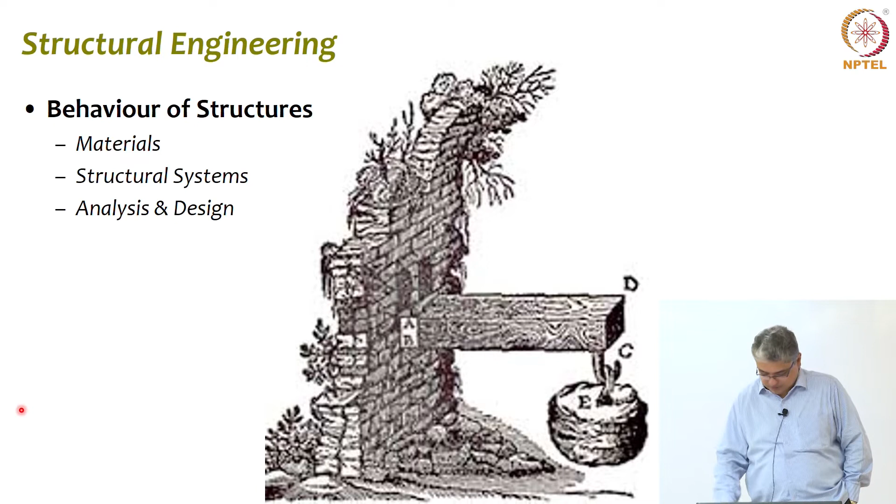So talking about materials, if you think of civil engineering as such, we use a lot of these, starting from simple thatch to earth, mud, clay, then stone, wood. Wood is a very important material that has been used very successfully in civil engineering. Then of course brick, concrete, steel, and so on.

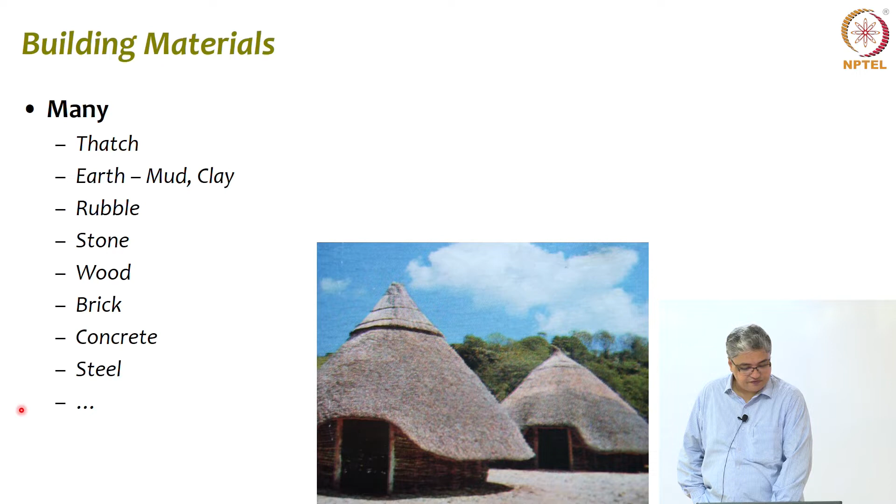So I'll not go into the details of all these, but effectively what is it that we are looking for when you talk about materials? We are looking forward to understanding some basic properties, and the two fundamental things that we are looking for are chemical and mechanical properties. So what do we mean by that? How is that manufactured? If it is not a natural material, a man-made material, what constituents are to be added to make that material is the first thing, and then what properties help us actually create structures out of those materials.

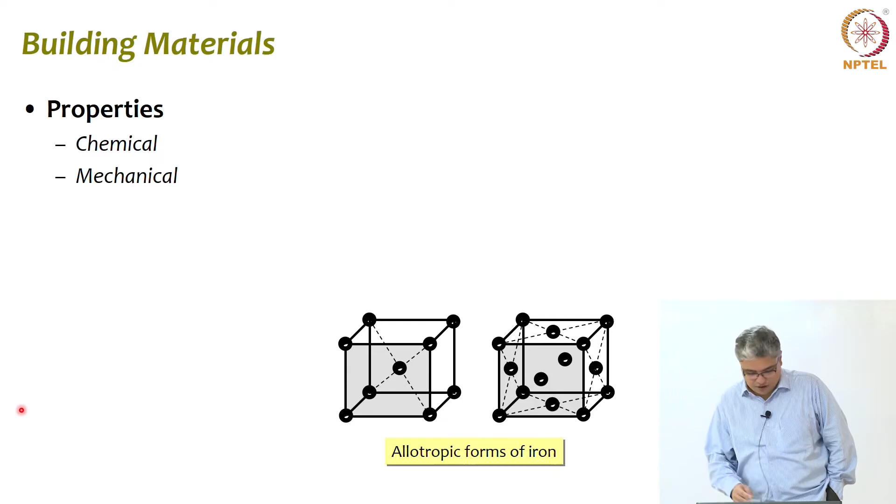So chemical properties are very important. For instance, steel is a very common material we see today, right? And that steel is made starting from iron ore, but then it has to be processed and made into a form which we can use in construction. You see two different allotropic forms of iron which give certain basic properties to the steel. I'll not go into the details of it, but chemical properties are important.

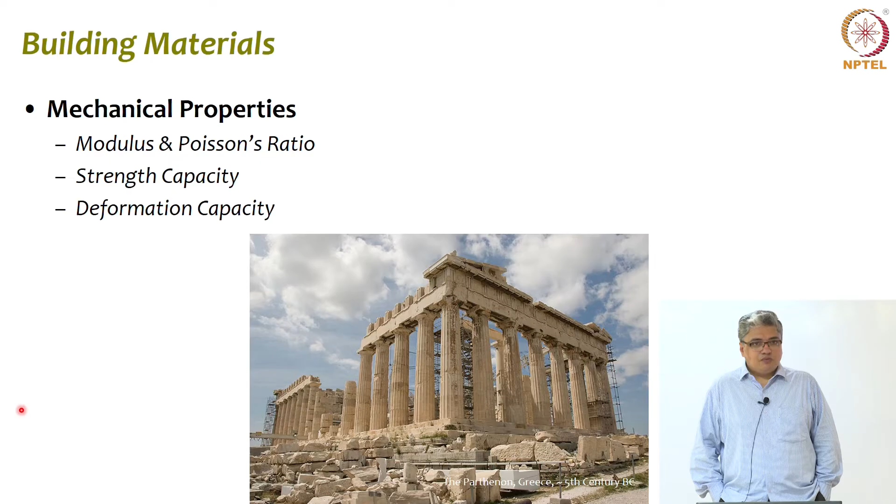Similarly, cement and other materials that you are using, what is the composition of different ingredients that gives it its characteristics. But talking about mechanical properties, again there are a whole lot of other mechanical properties which are important for different cases, but the fundamental things you must know at this stage are what is called the modulus of elasticity, Poisson's ratio, which is nothing new, all of you have learnt about it in your physics. And then we talk about strength capacity and deformation capacity. Let us see what this is.

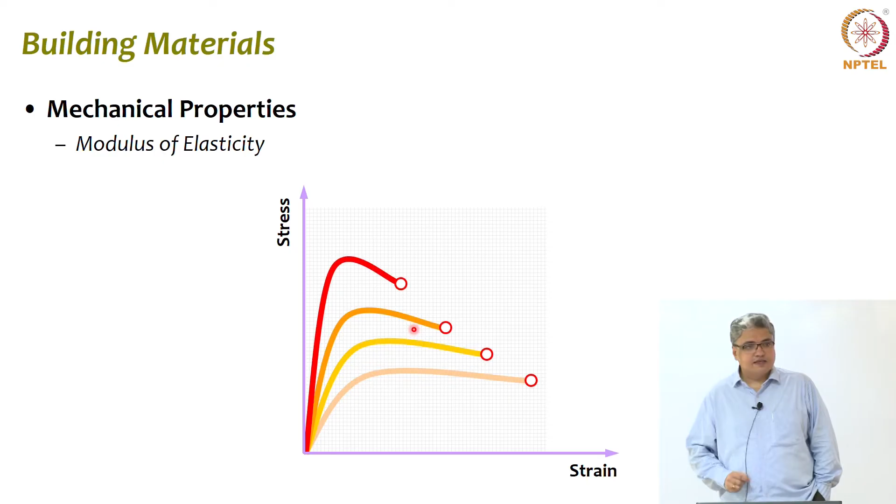So if we start with a material, the first thing we talk about is its stress strain curve, right? All of you are familiar with stress strain curve from your school days. So just to give you an idea, I'm drawing some stress strain curves. It doesn't matter what material, but just look at the nature of it. Typically what you will see is that as we start, initially there is a more or less linear elastic portion, and then it touches a maxima in terms of the stress, and then the material moves, deforms or strains by different amounts. So we can have things like this. So modulus is this initial slope, between the stress strain curve, this initial slope is what is called the modulus of elasticity.

Obviously, we are looking at different materials having different modulus of elasticity. For example, if we talk about steel, the modulus of elasticity of all steels varies more or less between 200 to 205 to 210 GPa. What is GPa? Gigapascal, Pascal, you know, Newton per meter square, right? Similarly, if you look at different materials, you will see different materials have different modulus. Similarly, different materials will have different Poisson's ratio also.

But more than that, as structural engineers, we will be looking very closely at this value, the maximum stress that a material can handle and the maximum strain that a material can handle, right? So let us look at it.

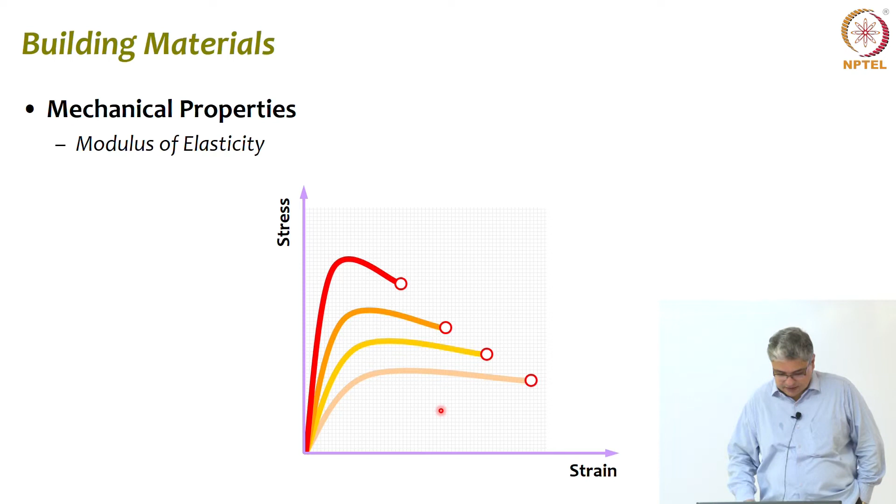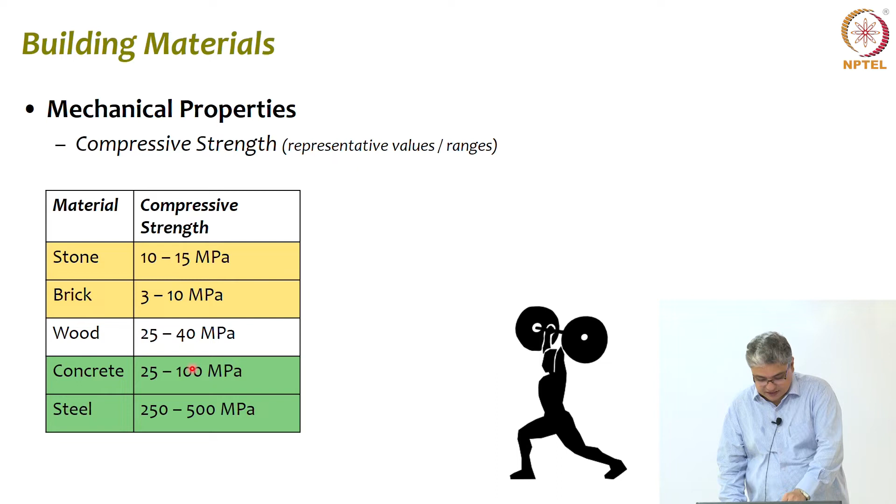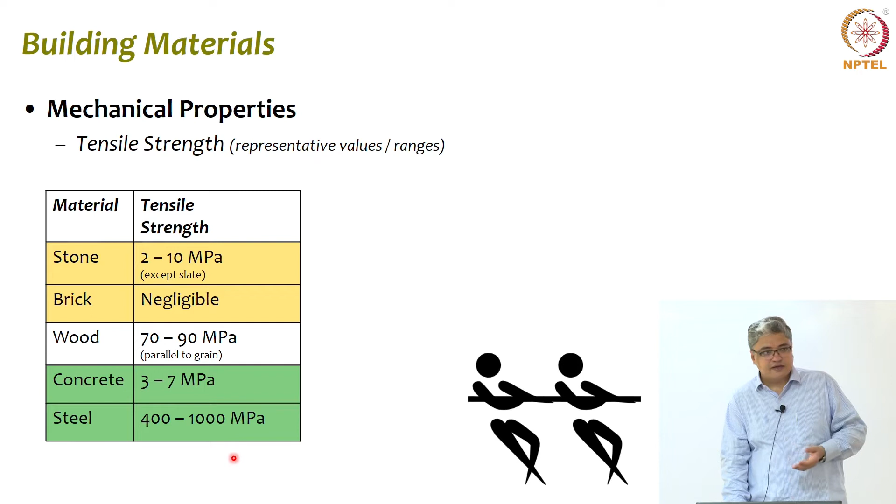So we see there is a basic difference in material properties. We keep in mind that certain materials can take compression to an extent but cannot take tension, and certain materials can take both, are good in carrying both tension and compression. If we understand this concept, we will understand why we are building certain structures today using certain materials which we were not able to do earlier.

For example, mild steel has a certain mild percentage of carbon added to it, and that's where the name comes from. You can have low carbon steel, mild carbon steel, moderate carbon steel, or high carbon steel. Typically, the stress strain curve looks something like this. Here you see the strength is about 250, and typical concrete strength we saw about 25, 30, 40. Today we are making 100, 120 MPa. So the strength is about one-third to half.

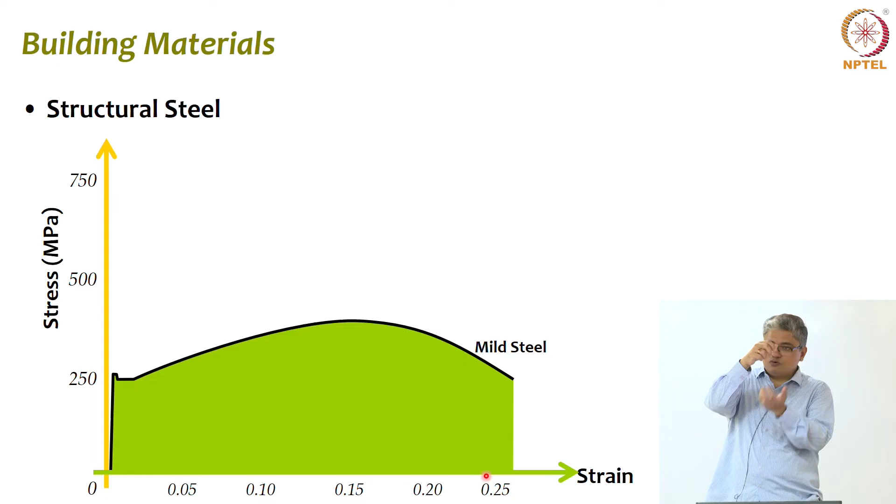And here if you see strain, I did not talk about the strain. Here it goes to about 0.25, that means 25% elongation. Concrete, the strain will be something like 0.0025, 0.0035, one-hundredth of this. So if I take steel versus concrete, load-wise concrete will take about half to one-third, and deformation-wise it can deform one-hundredth of what steel can deform. And if you talk about masonry, it cannot even deform, cannot even take what concrete takes.

So that's where we have to understand why different structures are being built with different materials. What I'll urge you to do is, on this graph, draw the stress strain curve of concrete, wood, steel, stone, and masonry. Now this behavior changes, we saw in both tension and compression, they are not symmetric. So your exercise would be to take a sheet of graph paper and draw all these to scale and see how materials are very different in terms of their behavior.

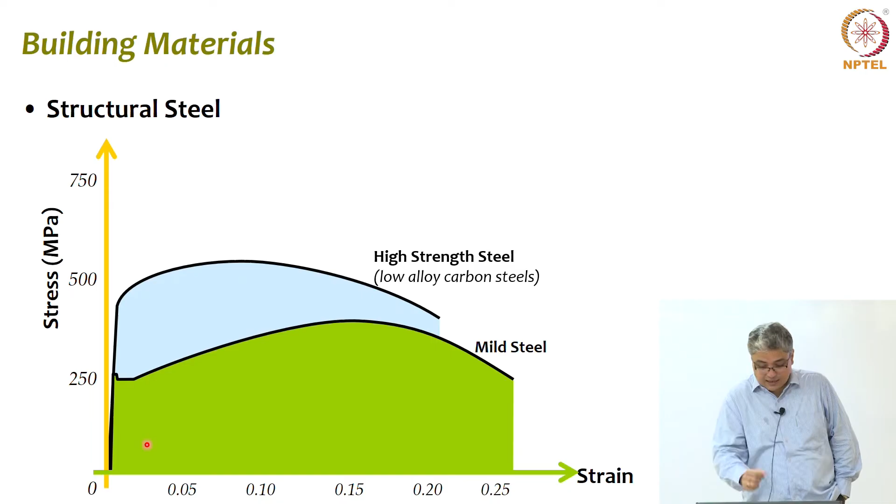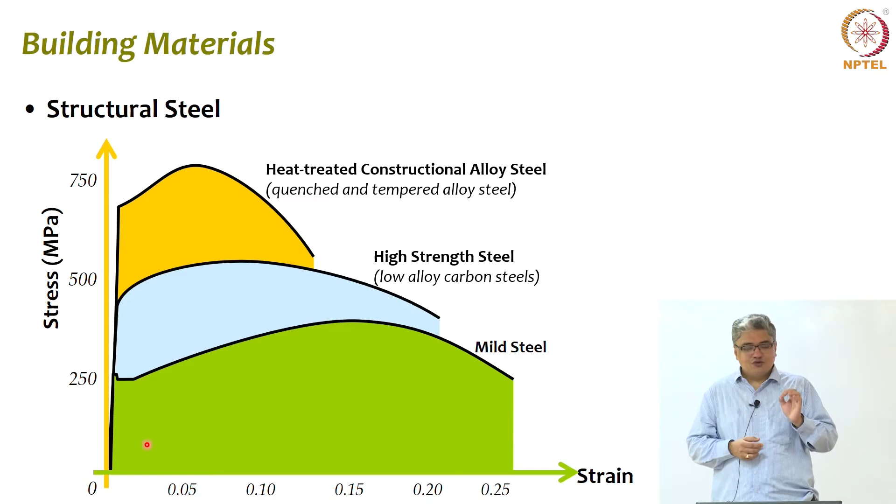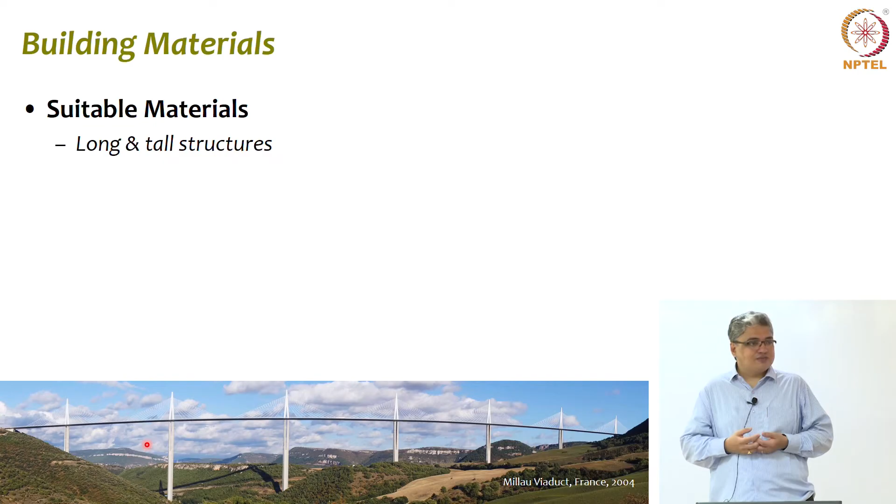Same steel, we can change the chemical composition or manufacturing process and create different strengths. One classic example you see today is steel, or iron, which we know rusts, and then we have stainless steel. We change the chemical composition a little bit so that through this process we are able to create what is called stainless steel. So go and find out what is added to make stainless steel. Very interesting exercise. Basically what I'm trying to impress upon you is that material or availability of material plays a very important role in deciding whether we will be able to build these tall structures, long structures that we see today, that we are eager to build.

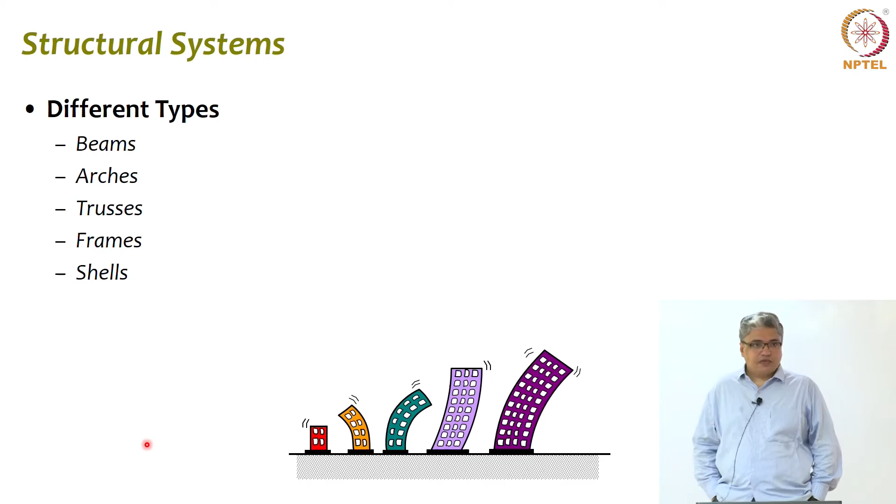Talking of structural systems, there are different types of systems. Starting with simple beams, we'll see examples of simple beams. We'll see arches, then we have trusses, frames, shells, and so on and so forth. What you see here is a very simple example. What you see here is what is called a cantilever. What is cantilever?

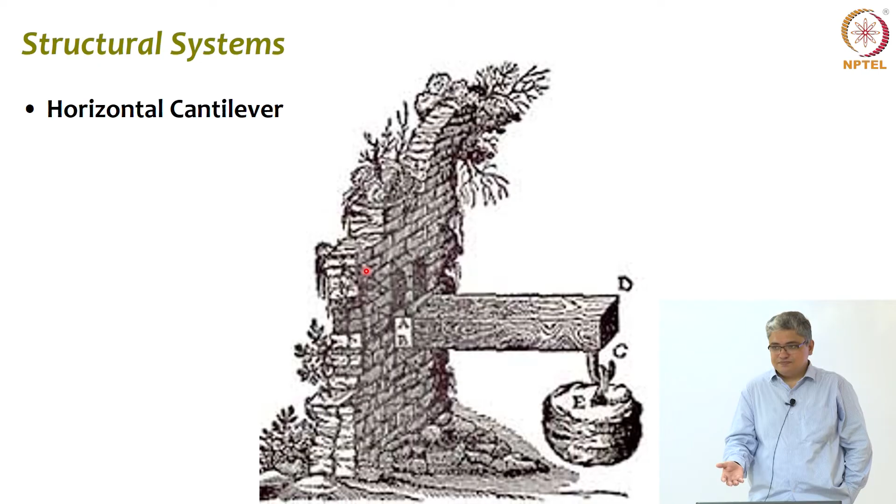It's like my arm which is projecting out from my body, and imagine I'm holding a load. That load is hanging, so this weight is acting on my arm and something is happening to my arm. So here is the cantilever, here is the load, here is its support, and we need to understand what is happening to the system.

So here you see a cantilever, this is the cantilever portion, here is the load, and something is happening here. Our focus is to understand, not just see and say oh, beautiful picture. We'll appreciate all these beautiful photographs, but as structural engineers, we'll try to understand what is actually happening within this system.

So let us see. I'm sure you will agree that if I go on increasing this load, my hand will start doing this. So I can simply bend about this hinge, or if I put it fixed, my hand will be straight. You can do this with a simple example, like you have an eraser, you try bending, putting a load on one side, hold it, and you will see it will bend.

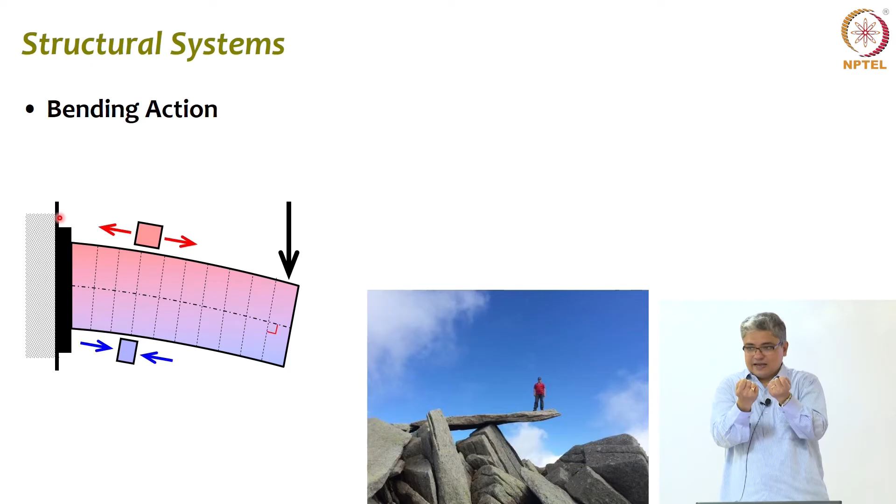So when it bends, you will see on one side this side is getting stretched, whereas the bottom side is getting compressed. So when I say stretching, it is nothing but under tension, and when I say compressing, it's under compression. So now think of what is the material it is made up of.

If you have a material which is very, very weak in taking tension, what will happen? That material will fail, will break off, and you will not have that cantilever working. So for this to work, two things has to happen. One, the amount of stress, tensile or compressive, must be less than the capacity of the material, and the higher the capacity of the material, the more the load we can apply on the system. It's simple in that sense.

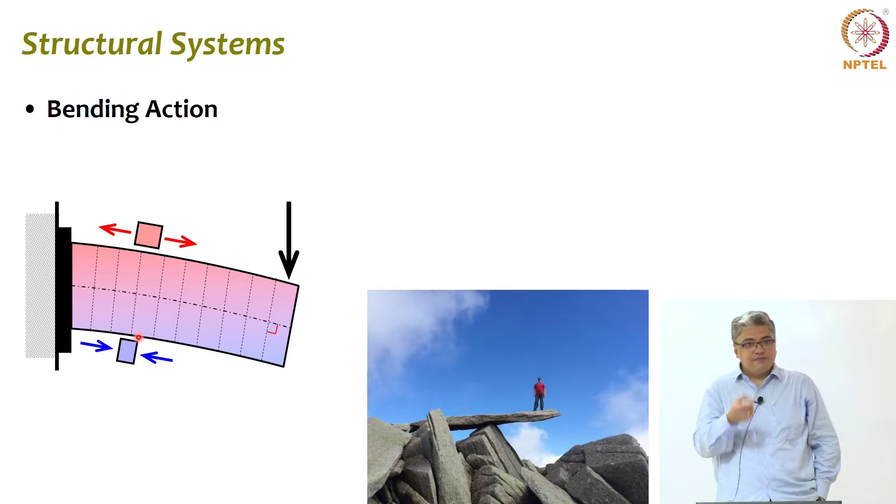So we need material which is able to carry this tensile force as well as this compressive force. Now if we have a material which cannot take any tension, then what can we make a cantilever out of it? No, simple thing is that. That was a horizontal cantilever.

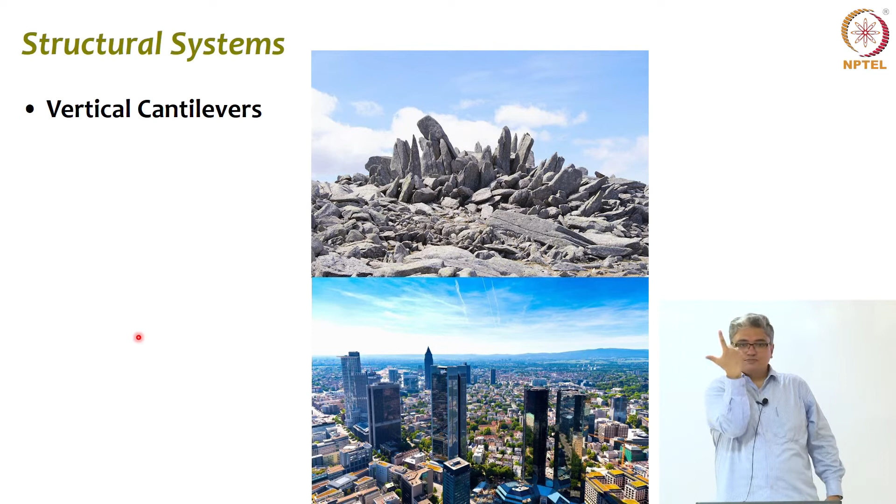All the structures that you see standing today, if you can just turn the reference, instead of having your xy axis like this, put it like up, turn it 90 degrees, and you see all these structures as vertical cantilevers, having some axial load acting along the direction of gravity, and some load coming from the sides, like wind load, wind pressure, and things like that. So these are all vertical cantilevers.

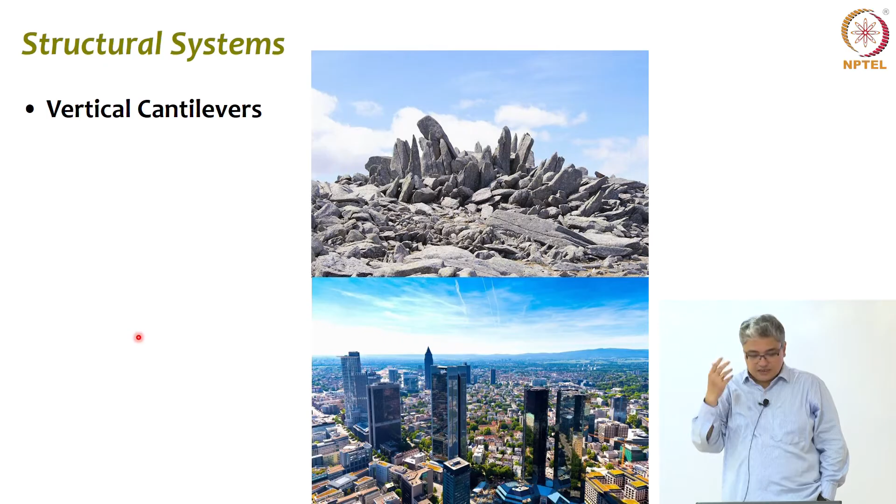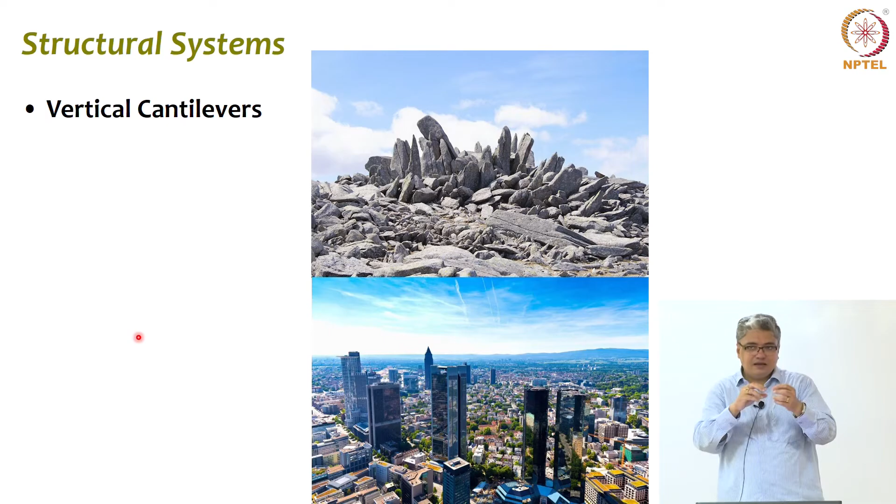So next time when you look at a building, that building is nothing as simple as this or that rubber eraser which you are bending. It's as simple as that. Only thing is the scale is different, the actions on it are different, and we'll have certain internal details to understand how that building can be designed and constructed.

In nature, there are hundreds of examples of beautiful structural forms and structural systems. The simplest is a branch, which is again nothing but a cantilever. But if you watch carefully, you will see the branch is a little thicker, wider, bigger where it springs from, and as it moves along it becomes thinner, and that is obvious because of moment, which you have learned in physics. If I put a load here, moment is only increasing, and that is why that's the natural form which helps. Taking cue from nature, we have built beautiful structures using that same concept.

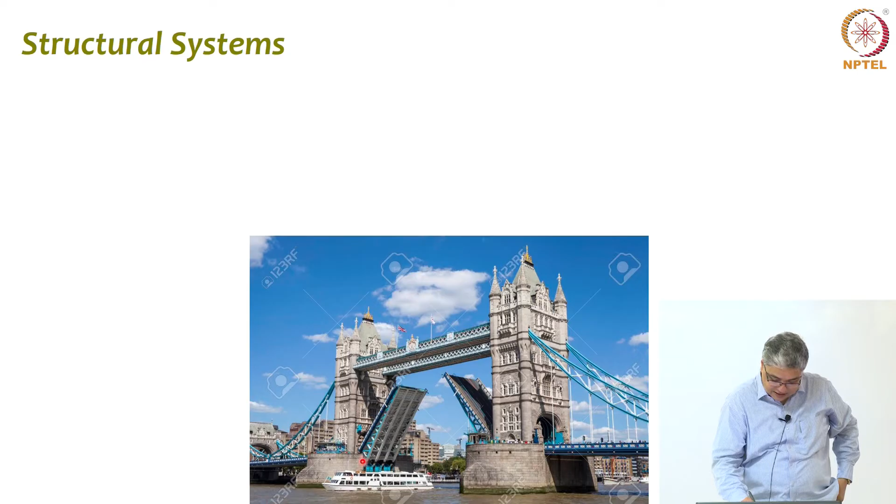This is the Tower Bridge, right? And if you see here, this is the deck, these two parts of the deck which open up to let ships move through. And if you see here, now it is neither a horizontal one nor a vertical one, but in some inclined position - doesn't matter. But that's a cantilever which is supporting its load, and you see this end is wider than this free end. It's so natural.

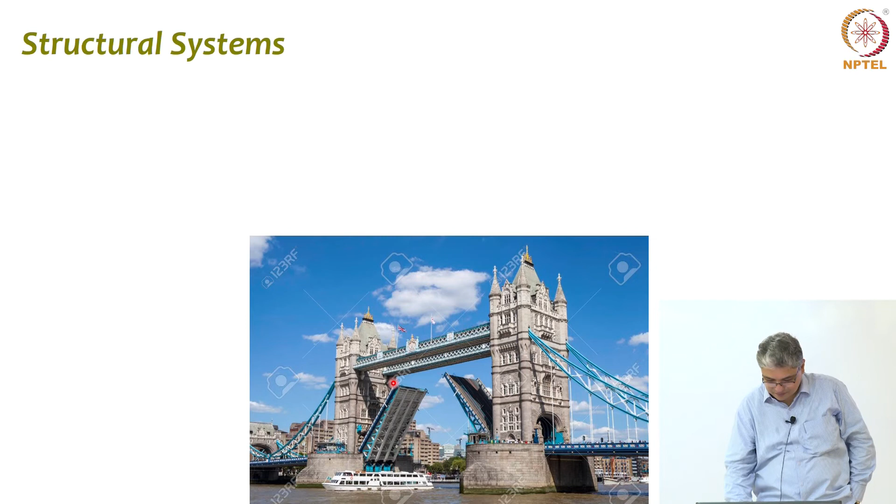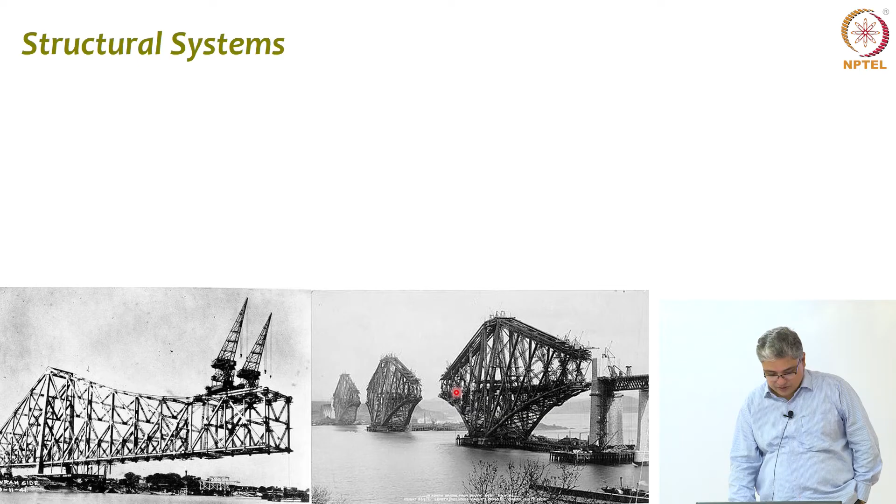And obviously we have this and we have this, beautiful, right? So here you see a cantilever, here you see a cantilever, here is a cantilever, but watch this little fellow.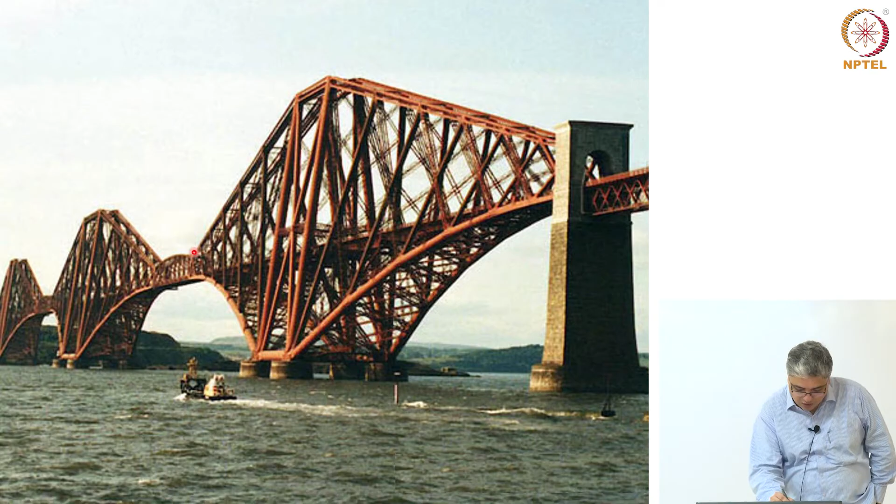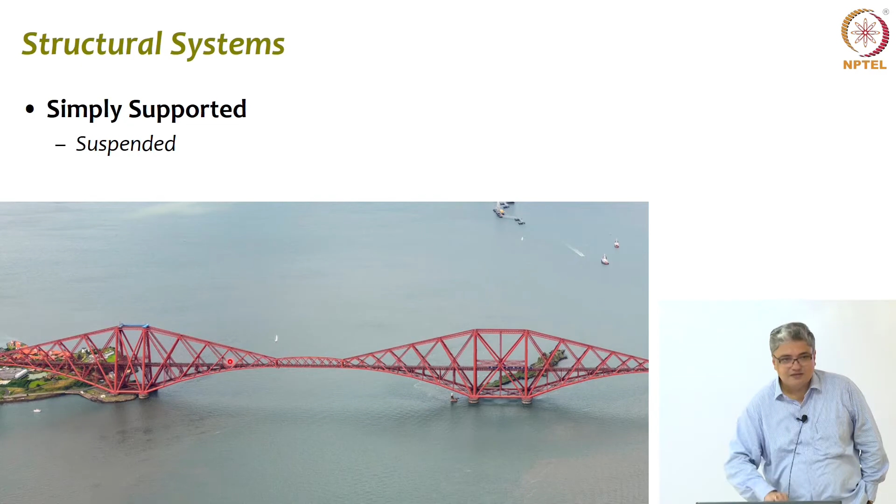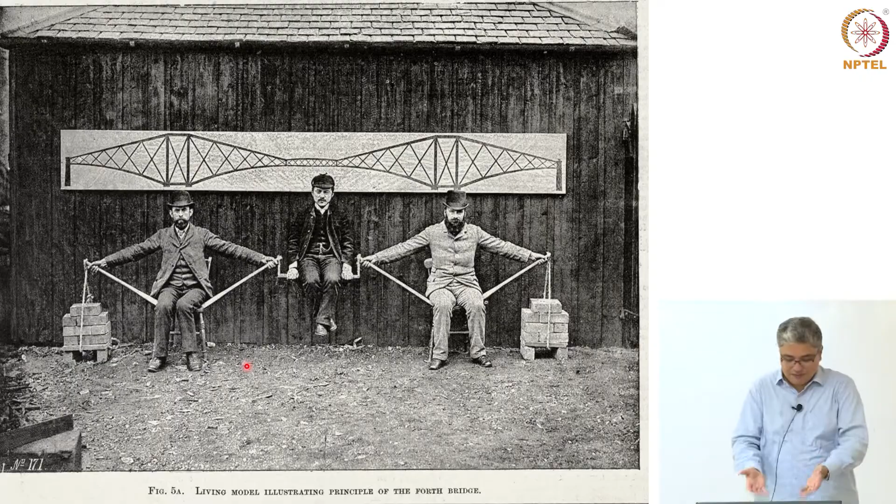What is that? That portion is supported on this cantilever, and it's actually a suspended one, which is another beautiful form of system, a simply supported system. This is a famous photograph you'll find everywhere, and I'll give you links to these photographs available on the internet. You see this man sitting on this, which is the load on this part suspended from here. So this is the cantilever, and here is this portion. This hand is in tension, this strut is in compression, and this man is causing bending of this.

This is the simply supported span, and these are the counterweights acting here, basically the other spans. Beautiful concept, high end engineering, done with basic understanding.

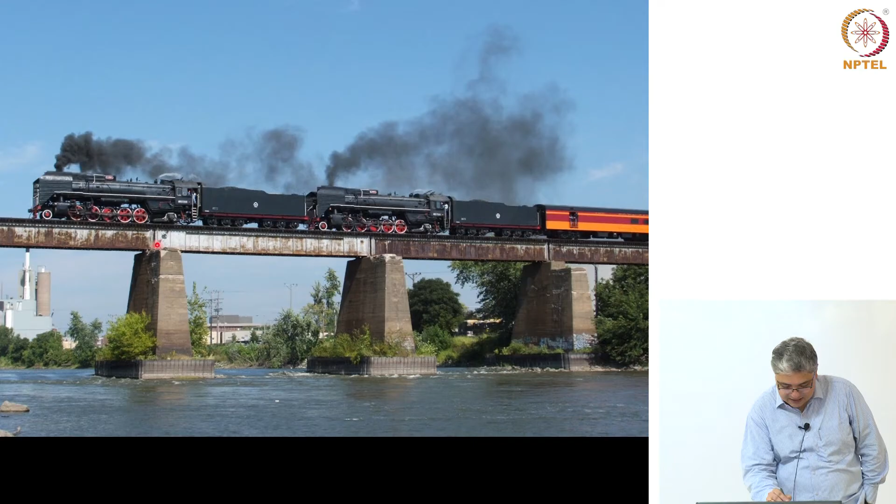That little portion in the middle, which is simply supported, is actually the most common system you'll find. What you see here is a bridge, but this bridge is made up of individual segments, one followed by another. These are called the piers which are supporting. One pier supports the left end of this segment and the right end of the next, and each of these is simply supported on the pier tops. This is what we call a simply supported beam.

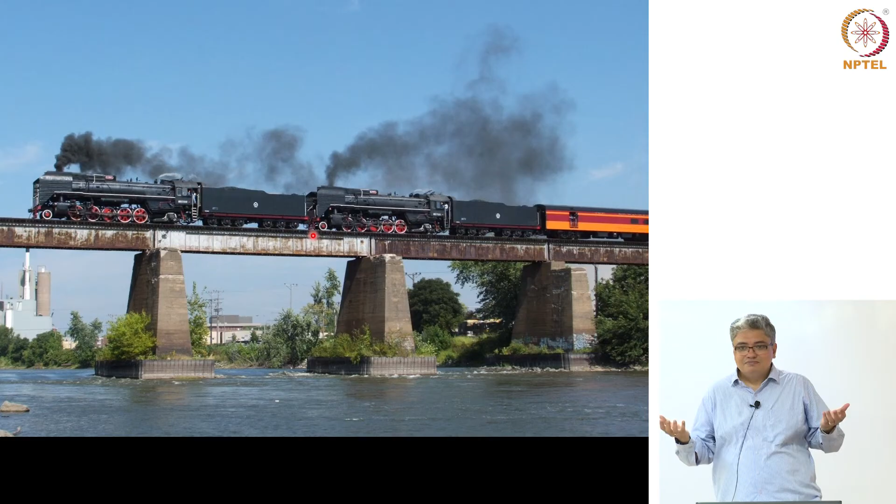So simple, the best example we've seen for thousands of years. Look at this, bridging the gap between two supports, the simplest form of structure we've been using for ages now. This essentially is what is called a simply supported beam.

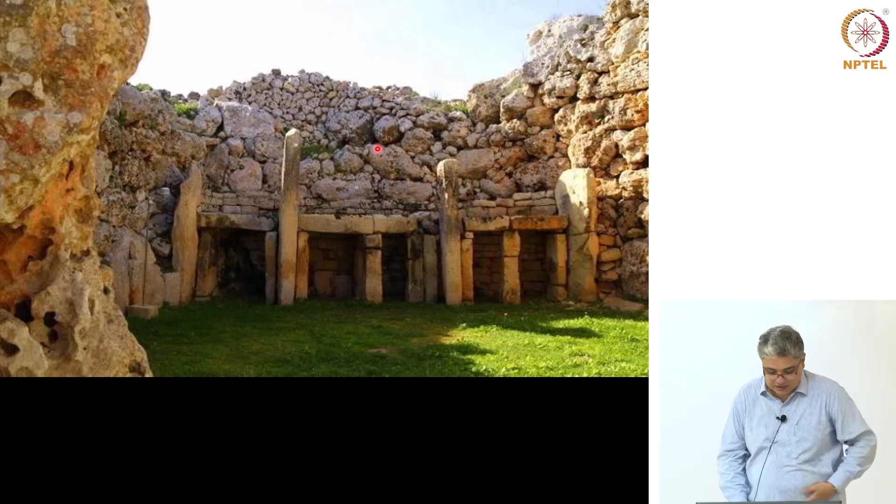I'll urge you to go to our main gate, the out gate, and see the flyover. There you will see exactly those kind of things, this deck in parts rested on these piers. Go and have a look at it. We have used this for thousands of years. The famous caves of Malta, you will see this too, these stones, simply supported beams supporting all this load.

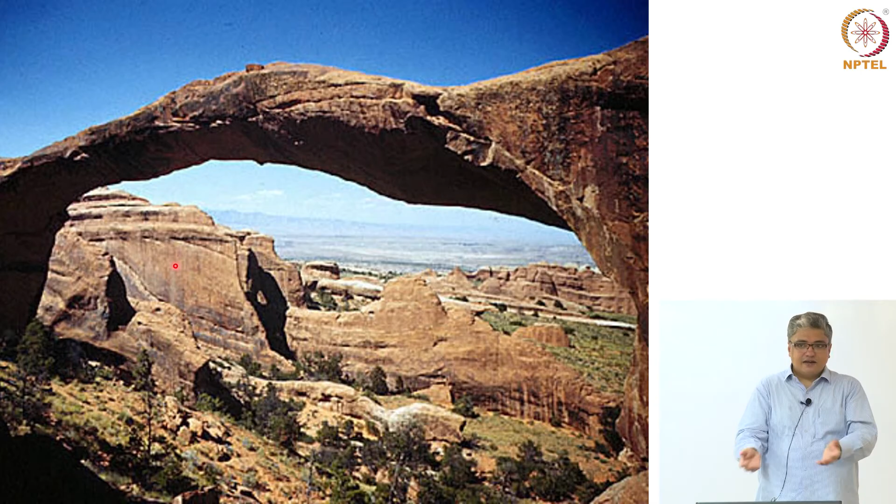But these beams, either this way or as a cantilever, bend, and bending means we saw tension and compression. What if we have a material which cannot take tension? We cannot use that, right? So naturally we have seen these kind of forms where it is not this way but rather this way.

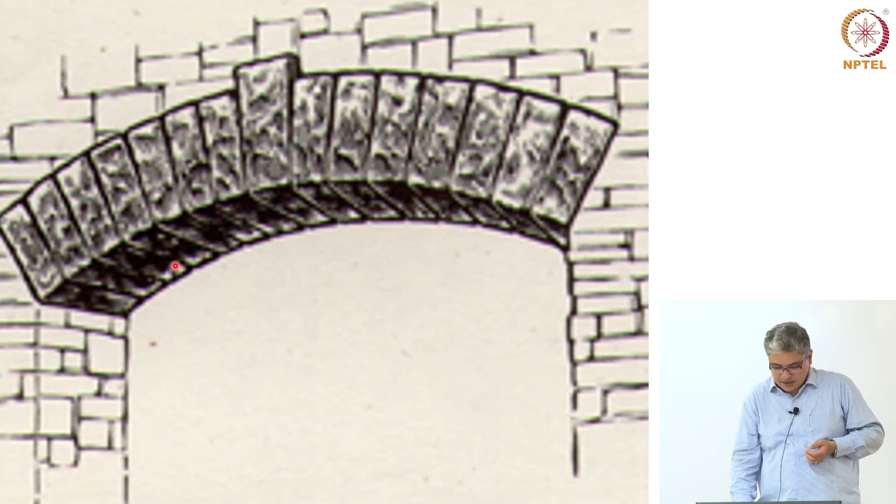What it does is, this is what we call an arch. Here you have a system where the load flows directly to the supports through axial action. It doesn't cause bending as such. So suddenly we find that with this kind of a form, we can even use materials which cannot take tension, which don't have tensile capacity.

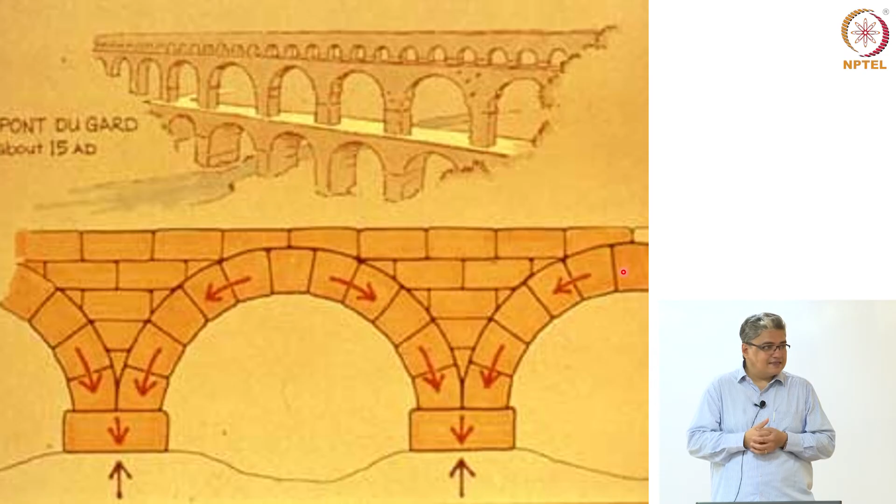And no wonder we build all these beautiful structures. If you remember, the earlier bridges were mostly these arch type bridges, not the simply supported bridges or the cantilever bridges. Those are modern, but the old bridges are all arch type because they used materials able to carry compression, and this form enabled that kind of system.

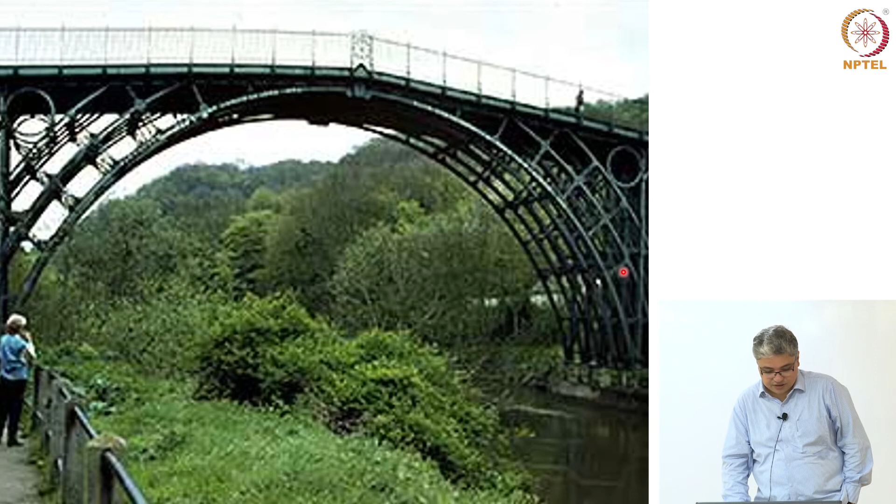Of course, we innovated, we had concrete, we built so many stone arches, and then in the 18th century came iron. This is one of the earliest iron bridges, but we continued with that form. An 18th century bridge, and then more recent concrete bridges.

So what you see is, I want you to understand this system. Here is the deck which supports all the traffic and the load, and that deck is supported on this arch, a beautiful arch. Effectively all the load is transferred on this, and this is what is taking all the load. When the load comes here, it simply flows to the supports, and so the deck is supported.

So we combine ideas. This is where creativity comes in structural engineering. You have an idea, you mix and match with other ideas, and you create new things. And that's the beauty of structural engineering. This kind of thing, where you can suspend a deck from a system, is what we know today as the famous suspension bridges.

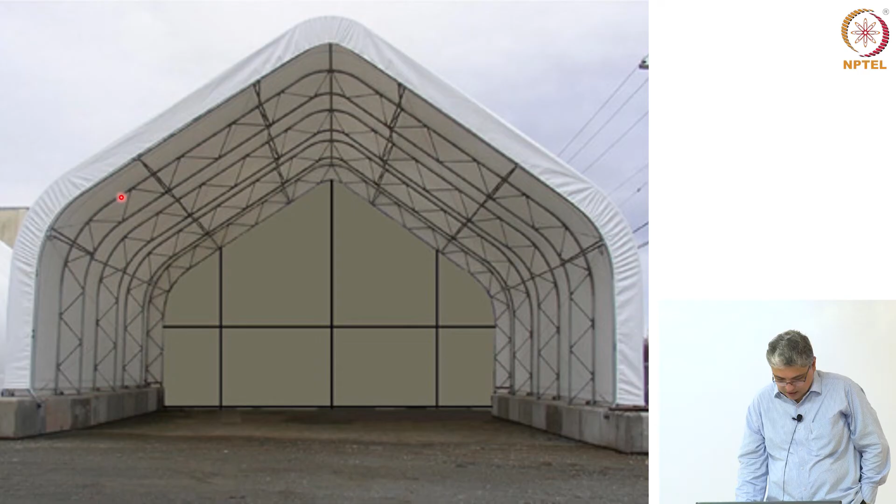Talking of simple structures, you can create a simple shade like this, and what you see here going like these are bracings for support, for stability of the system, and truss systems are very useful in creating such bracings. These bracings can be massive depending on what you are talking about.

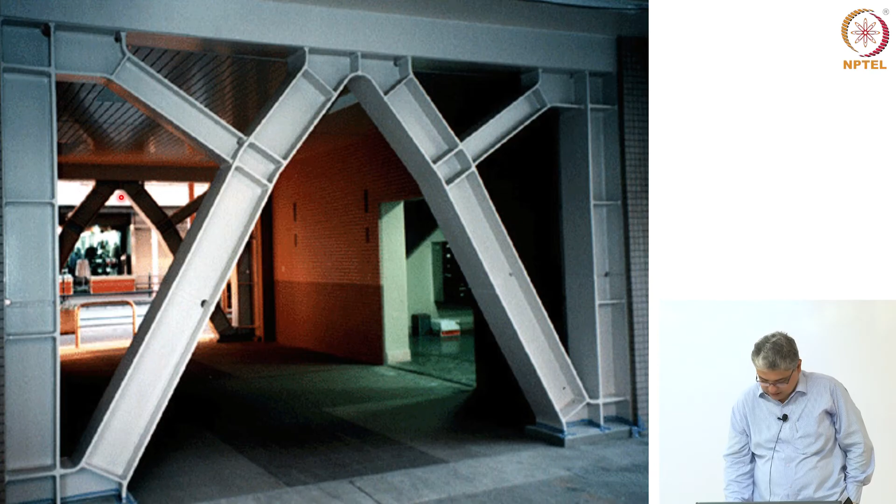So here you see a braced kind of eccentric system, but the more common system that at least in your undergraduate days you will have to learn and understand is how we create these simple structures like buildings today.

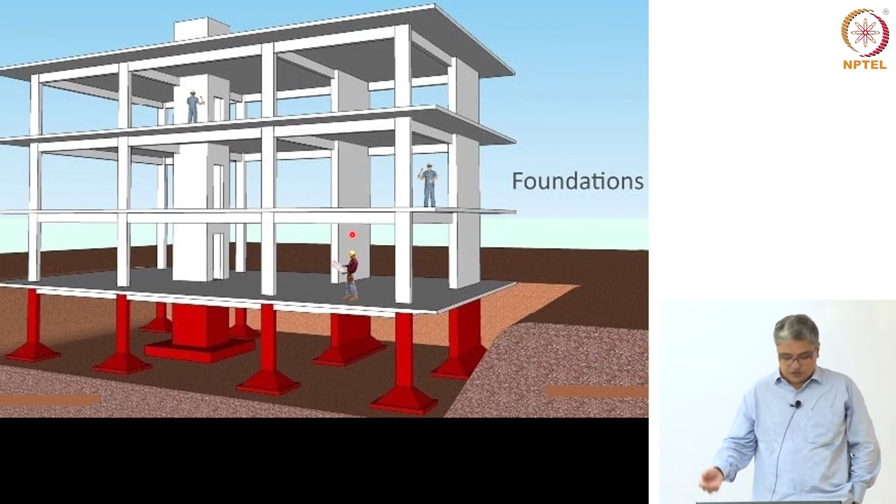But going back, this flat surface, the flat roof or flat floor that you saw - you will see if you go to your hostels where you have large spaces, small rooms, you have a flat roof, but if you go to a very large hall, you will see that slab, that roof is not just a flat system, but something more has to happen.

Sometimes you will find ribs, and even if it has to be even more, then obviously we see that these kind of systems do not work. We go back to that arch action, but in 3 dimensions, and this is what we created as domes.

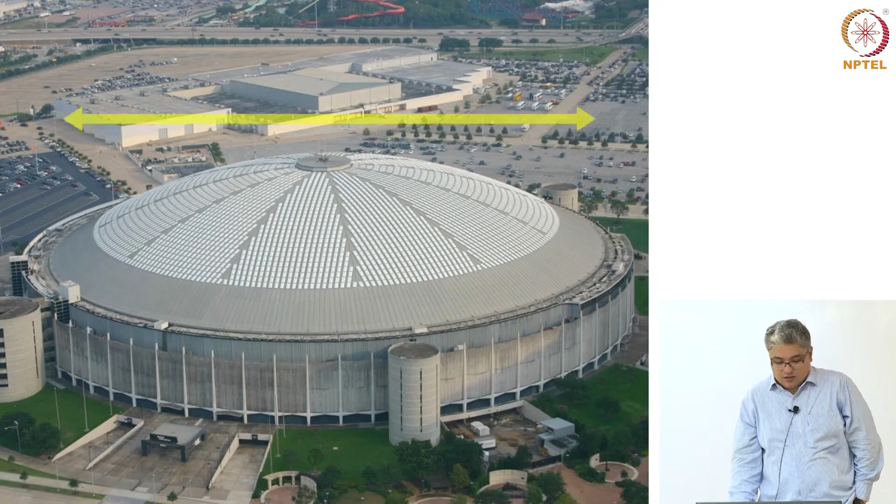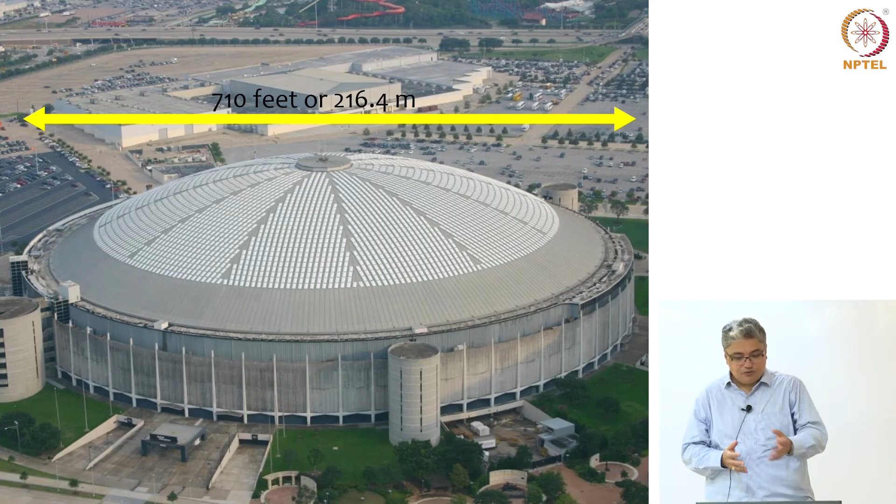In the 60s we created a stadium with a cover, and you can see from the top the system looks very similar, but look at the number now - a staggering number. And this was possible with slight modification of the system. This is actually the inside view.

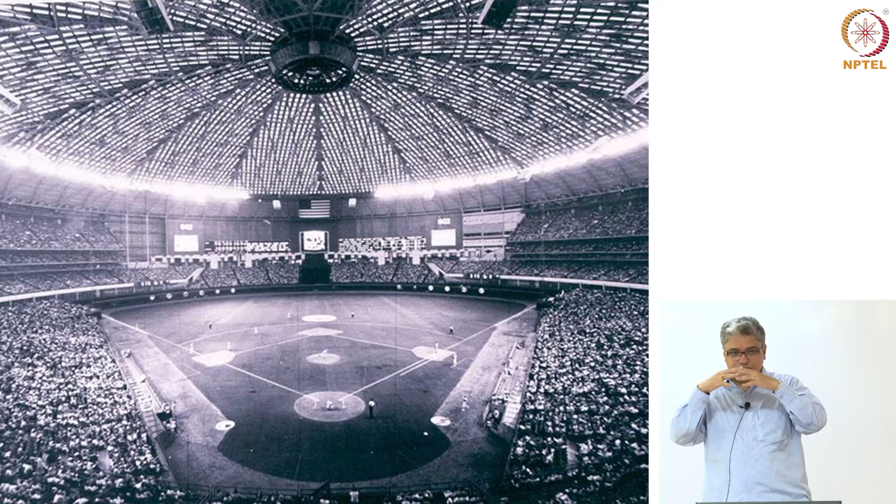So we are not creating a dome as such, but we are creating a system with different materials where we kind of replicate that action to the extent possible, and then transfer load and essentially cover larger and larger area.

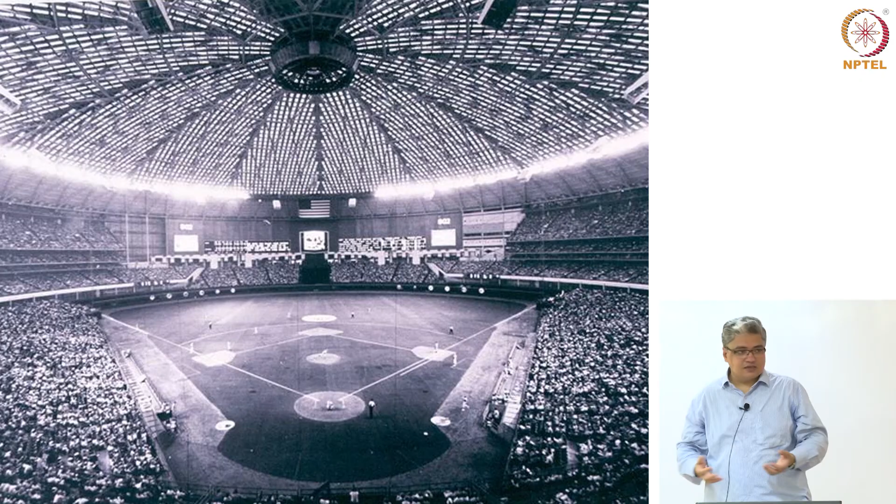And then of course, we have this. So this obviously cannot be done with materials that was used 2000 years back, and the structural system also is different, and we need to understand how do we create these systems.

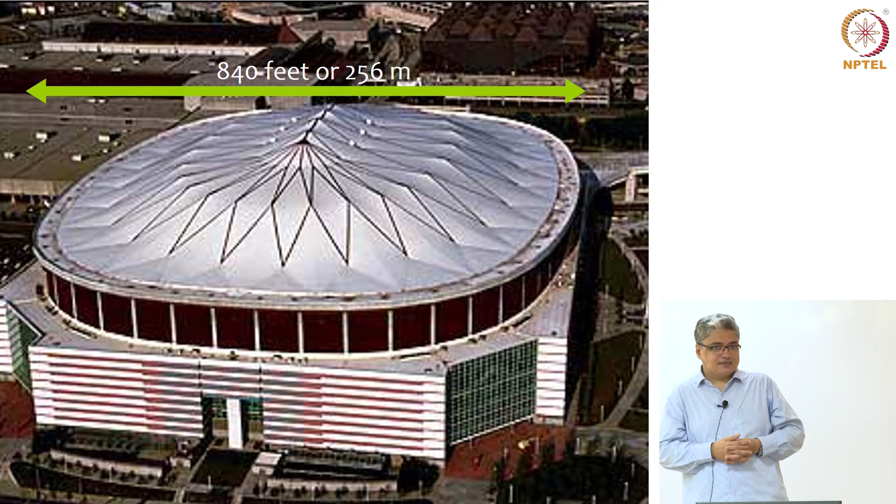And that brings us to the next item, which is analysis and design. We have to analyze the system to understand how a load applied to the structure is going to eventually get to the soil, which is going to support all the loads, and that whole process is analysis and design.

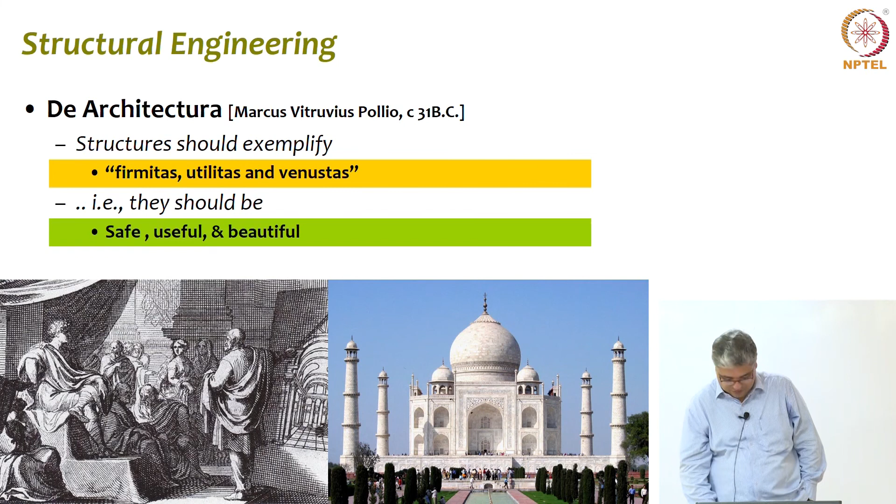So we saw this - our objective was a structure must be safe, useful, and beautiful. So what is safety? Safety is understanding the behavior. If we understand behavior, we will ensure that structure continues to stay there and do the work it is supposed to do without itself failing or causing injury and harm to others.

So analysis is that process which helps us understand how a structure would behave, and design is that process which helps us to control the behavior. We want the structure to behave in a certain way, so we control it through our activities as designers, as structural engineers. That is the process of design, and analysis is we analyze how that structure, once we create it, is going to behave, and that process is analysis.

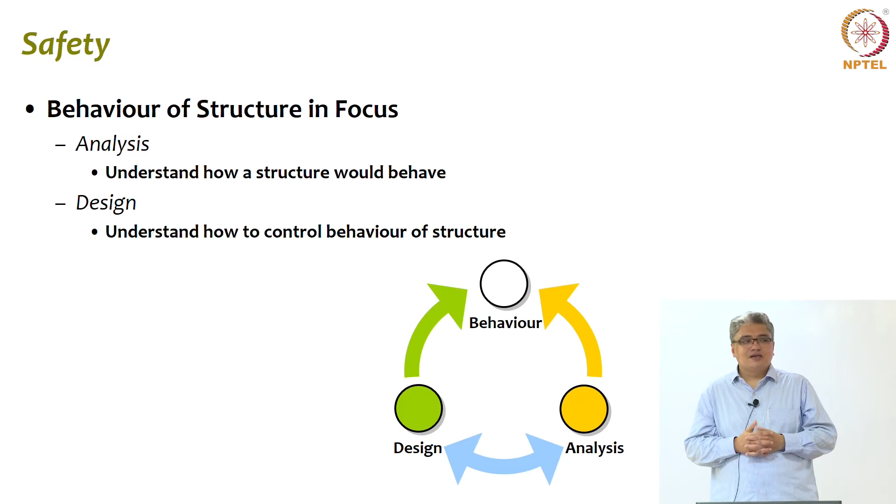We will stop here for today and continue this discussion tomorrow, and we will take it forward from here. So essentially what we have discussed today is materials. You got a little exercise today - go and find out, draw those stress strain curves on the same graph for steel, concrete, masonry, so to speak, compression, tension. We touched upon very briefly 2 or 3 basic structural systems. This whole process of analysis and design, and what a structural engineer is supposed to do, we'll discuss tomorrow. We'll stop here for today. Thank you.